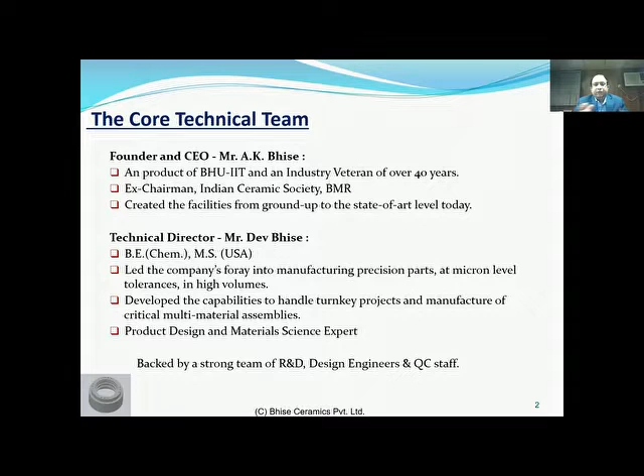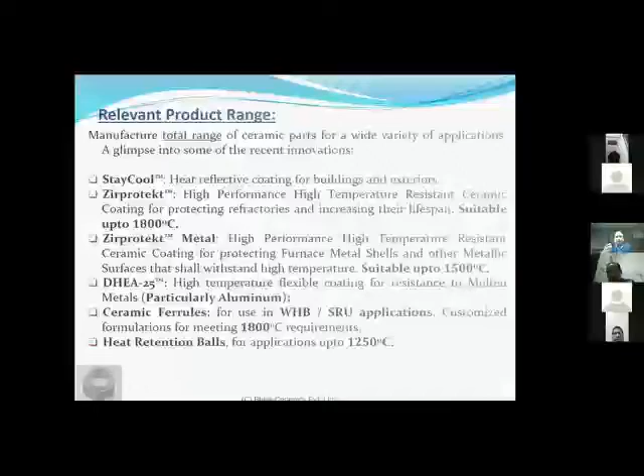Our first initial foray was into precision machining, where we were among the first few people in the country to actually have 3 or 5 micron tolerance products in India. Later on, we moved on to do turnkey projects of corrosion resistance and high temperature resistance, which is when we came to work on high temperature projects and how to have sustainable products. I'm proud to say that after almost 1.5 decades of effort, we have this whole list of products geared towards sustainability.

The first one, as Rege sir kindly put it, is Stay Cool, a heat reflective coating for buildings and exteriors. It's basically a coating - if you apply it to the roof of your building, 95% of the incoming heat gets reflected out, only 4% passes on, and that gets reduced further because this coating has extremely high insulation. So apart from being a reflective coat, it has great insulation properties.

It's a walkable surface. Unlike Western countries, our roofs are used for gatherings, AGMs, meetings and everything else. So this coating sustains all that wear and tear and still provides 95% heat reflectivity. Now imagine if it reflects back 95% of the heat, how much AC bill will get saved because the top slab isn't getting heated.

That's the first product. We have a product called Zirprotekt, which has high temperature performance. It's used inside furnaces where it protects the refractory lining, increases the lifespan, and provides insulation. So if any of you use high temperature furnaces, I would definitely invite you to try out Zirprotekt - you will definitely see a performance increase from your furnace.

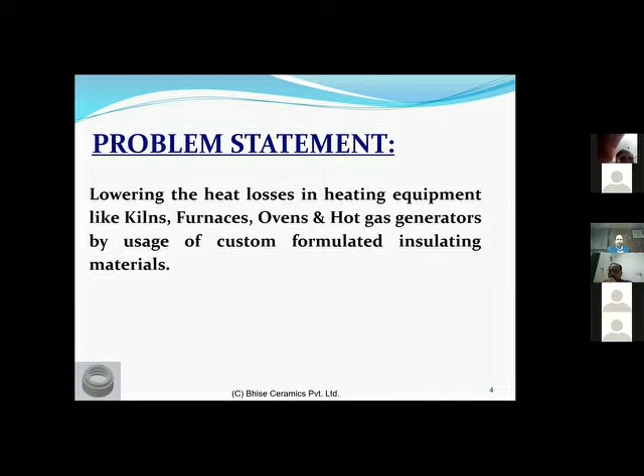They started developing different products from the crude clay bricks, from the crude clay-based coatings in earlier eras. If you go to the history of India and China, they had clay-based autoclaves, as we call them today. Then on, as the materials improved, there was a vast variety of materials that was made available.

Now, in general, what all materials would be there? In the initial days, the early 1920s, 20s and 30s, saw a lot of work on asbestos. They are now banned in many places because unfortunately they are carcinogenic.

Rock wool, glass wool is something that is being used in a very common way because it has got very low thermal conductivity and very low density. This is where the low conductivity comes in, because as you lock the fibers, you're creating a void space between them. So the fibers themselves may have higher conductivity, but the overall package has a low thermal conductivity. But the flip side is it has low density, so common fiber based furnaces or fiber based insulation would have a very thick wall. You would need 2 feet or more of wall to actually have a heat reduction.

Again, they are fibrous in nature, so they pose a health concern. As anyone who has worked with them would know, any fibrous based body almost always poses a health concern for humans.

Now, there are vermiculite based products as well. The vermiculite based approach has a bit of a challenge because there have been cases reported in the USA where the vermiculite itself was found to contain tremolite, which is the most hazardous form of asbestos. Those who want to really research on it can get in touch with me, and I can provide you the necessary links to see vermiculite and asbestos and the impact on health.

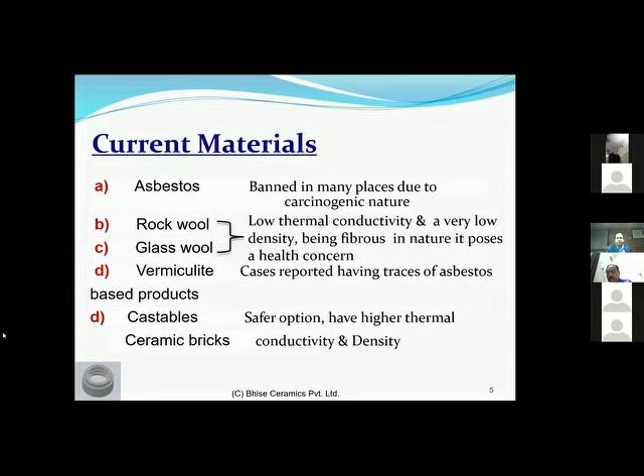More importantly, bricks have more thermal conductivity. Standard bricks used for lower temperatures have thermal conductivity in the range of 1 point something to as high as 1.8. If you go higher in the series, you have bubble alumina, which is at the other end of the spectrum, with thermal conductivity of about 0.17 to 0.18 watt per meter degree Kelvin.

So overall, if you have to categorize an ideal insulation material, it would meet these parameters. It should have low thermal conductivity, meaning it should offer very good thermal impedance. It should have higher density than the wools, so we can go for a lower thickness. Of course, it should not be as dense as the bricks, but it should have a low density compared to bricks, yet higher than the wools.

The material should not pose any health concerns to installers or users. This is very important, because if your users or installers face health issues due to the insulating material, that's a big problem.

And it should be convenient. Nowadays everything is based on convenience. How convenient is the product for installation? Can it be installed with ease, or does it require specialized installation? Does it require joining a lot of parts together? If you're going for a board-based geometry, you have to worry about the joints, sealing the joints, breakages, and most importantly, the leakages.

If it can be cast in situ, that is where the material triumphs, because you can create a continuous wall as long as you want, and if you do it right, it will sustain.

So if we define these parameters to be the critical ones that define good insulation, let us see how Thermprotekt fares against it.

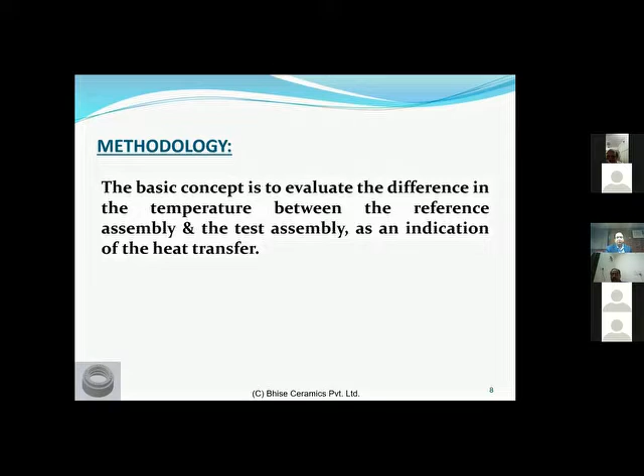You have a base plate, which is an MS plate, and you have a substrate on top. The base plate is made of MS. We have taken a base plate over here so that the heat source heats the base plate.

We have the hot face reading, which is the temperature of the base plate. And you have the temperature of the top of the substrate, which works as your cold face reading. One of the roles this base plays is you really have a uniform heating across the surface, so when conducting this trial, you have a very good idea of what the hot face temperature is and what the cold face temperature is.

Now, how does your test assembly look like? We coat it—we use a substrate which is coated with Thermprotekt, and we put it face down, so the coating is in touch with the hot face, or the heat source, or the base plate.

As you can see clearly over here, this is a coating of Thermprotekt applied on the substrate. The coating thickness is minimal, 1.5 to 1.8 mm. I'm stating this because when you coat it, there are bound to be some variations, and we have worked to make it very accurate.

Sorry to interrupt you, Dev. You have to go a little bit louder, please. Okay, am I audible now? Yes, yes, this voice we require. So I hope the earlier part of the presentation was not Greek and Latin to everyone. See, initially you were okay, then slowly your voice volume went down, so just keep it up. Okay, thank you. How's the Josh? Very high, sir.

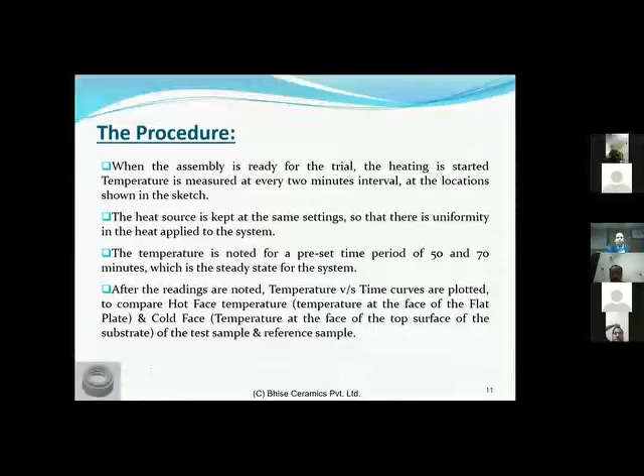If you think in terms of furnaces or any other heating application, a 10-minute earlier stabilization with a 1.5mm or 2mm thick layer, you can imagine the kind of saving this would produce. At the end, when we stopped after 70 minutes, the temperature gap was about 80 degrees. So with a smaller scale heat source, a 1.5 to 1.8mm layer is giving you a difference of 80 degrees.

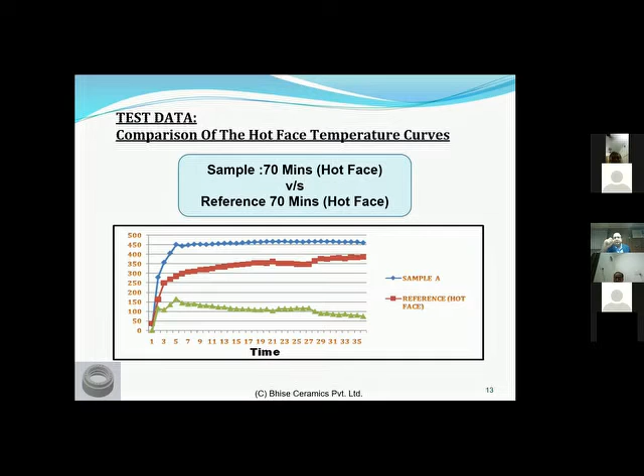We did the same thing for 70 minutes. Here we got about a 120 degree difference. But you can see pretty much the same thing: the curve is far steeper, and you're having stabilization fairly quicker than the earlier one. So in both cases, you can see that usage of Thermoprotekt is really giving you a drastic difference.

Cold face is also an interesting phenomenon. At the measuring time, at the steady state close to the operations, you almost had a 30-degree difference. So if you see your sample phase where Thermoprotekt is applied and the heat is going through Thermoprotekt on the other side of the substrate, versus the reference which has no Thermoprotekt, you'll see the cold phase difference is almost 40 degrees or 30 degrees.

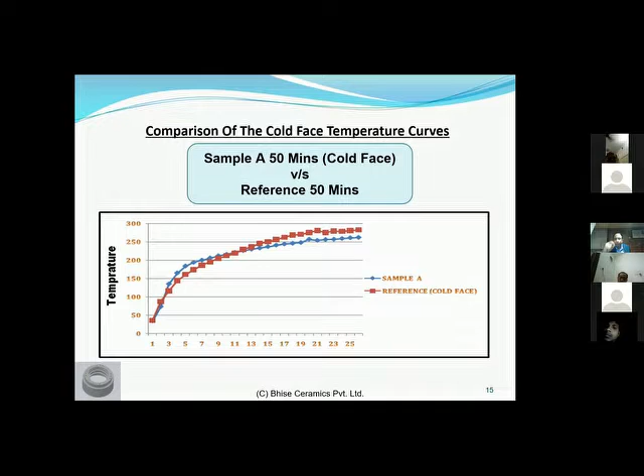So your cold face on that system, over a temperature of about 250 degrees, has a temperature gap of 30 degrees. This is what you're talking of as performance - a small coating is giving you this kind of difference. The same thing is shown here after 70 minutes; the gap has slightly closed down, to about 20 degrees. But we are talking of just 1.5mm thickness.

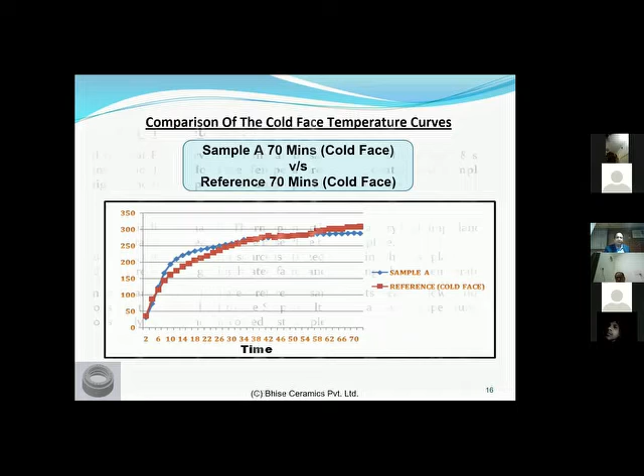So now, to summarize these observations, you can see that if the hot face curves are compared, with the same amount of heat input and the same time period, the hot face of the coated test sample is at a higher temperature than your control sample, and the ramp up rate is much faster. This indicates that even the small layer gives very high impedance to the transfer of heat from the base plate to the SS plate.

What it really means is, if you have a barrier there, the heat actually does the work of warming up the plate and doesn't transfer it to the substrate on top. In terms of your furnace, more amount of work would be done inside the furnace, warming and heating the articles, rather than the insulation eating away into the heat.

So this is what we are saying - it will help retain the heat inside the heating equipment. It shall help the heat come faster, your ramp up rates would go faster, and you would have savings on energy due to lesser losses.

As we saw in the earlier case, the steady state temperature was attained in about 11 minutes versus 21 minutes in the control. You can have more heat working on the components inside than on the insulation because of this. Again, if you see the cold face, you will have a cooler cold face. So the trend is that you need the cold phase, the exterior of the furnace, to be something you can touch.

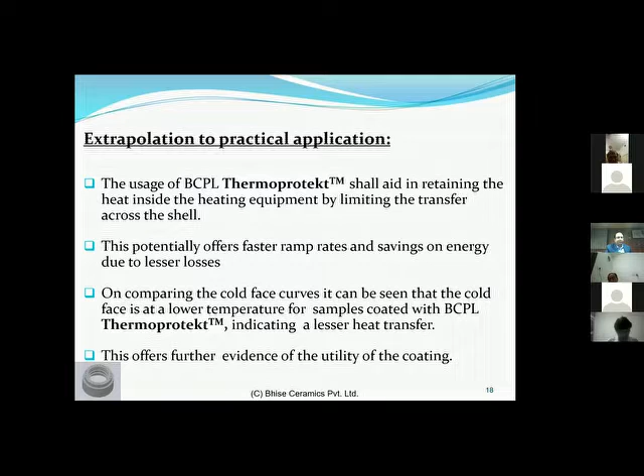So for those kind of requirements, this is an ideal product, because if you use a last layer on the inside of the shell, it will really help in taking away the last bit of heat that goes across the furnace. So coming to the conclusion of this presentation, as we move further, some of the characteristics of Thermoprotekt, as we would like to share with you.

The thermal conductivity is around 0.13 to 0.15 watt per meter Kelvin. The density is 0.65, and the density of water is 1, so this is an insulation that will actually float on water. The max usage temperature is about 700 degrees centigrade.

So it will work for major applications of furnaces where you're having ovens used in the automotive industry for curing of paints, ovens used in various other metal processing industries, as a back end for various ceramic-based furnaces, or any high temperature furnaces. They can be used in heat treatment furnaces with a top coat of Thermoprotekt.

So if you use Thermoprotekt to face the hot phase and Thermoprotekt as a backup layer, you can see a solid amount of savings there. The beauty of this is the PLC at 700 degrees is just 1.5%. And LOI, which is the moisture content after you dry it up, is going to be about 0.5 to 1%.

So we are talking of various applications over here. The world is massive for the applications of this product. And one of the reasons that we have this ASM around is to look for such applications and create energy savings such that the planet becomes sustainable to hand over to the next generation.

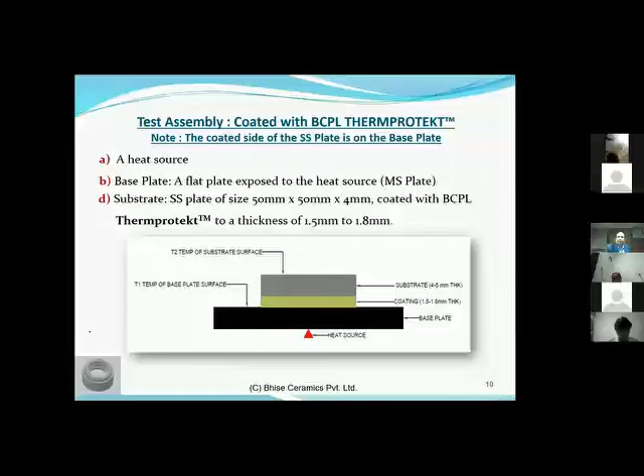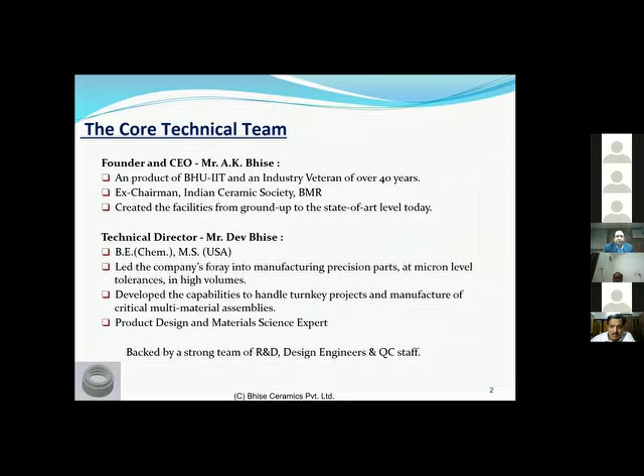So this is more about our team. My father, who is there on this call right now, he's an IITian from BHU and a veteran. This was known. Just go through this thing, the slides, no need to talk about it.

See, the question here is, are all these products innovations through... I mean, how, but these products have been innovated by you only, or how is it?

Yeah, this is all manufactured, designed, and tested in-house by us. And patented also - we are in the process of patenting them at the moment.

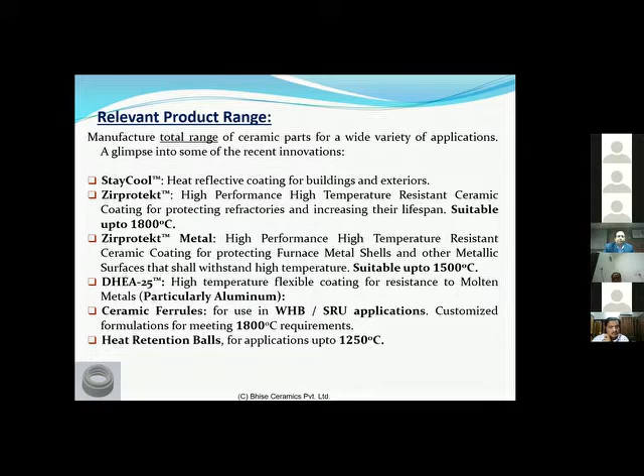Awesome, okay. You may rush through the slides right here. Yeah, go ahead, please. Yeah, move on, please.

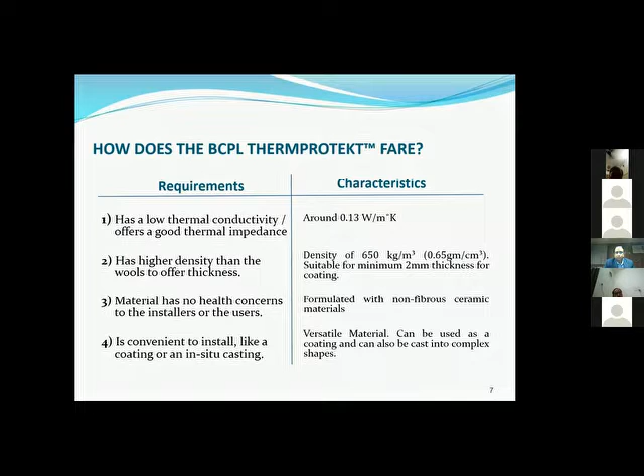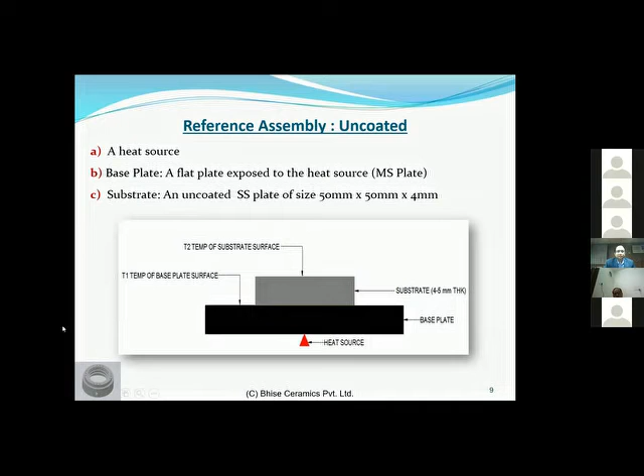Mr. Bhise, thank you very much for a very nice presentation. It appeared that it is not coming from an industrialist, but from a professor. I will take that as a crisp compliment. Very short but nice presentation. Both son and father, you are from IIT. Of course, your father's time it was not IIT, now of course it is called IIT BHU. So first, congratulations for that.

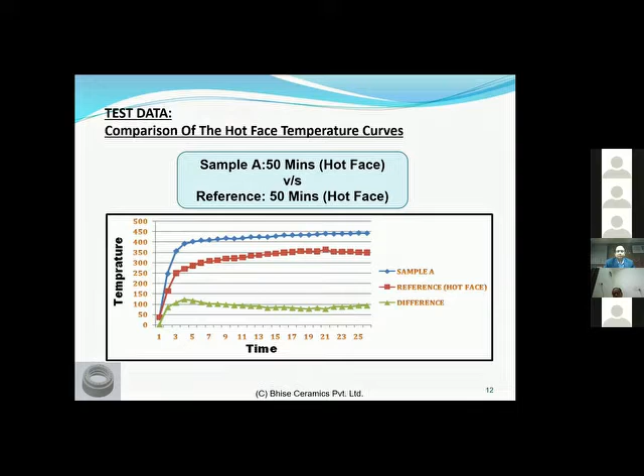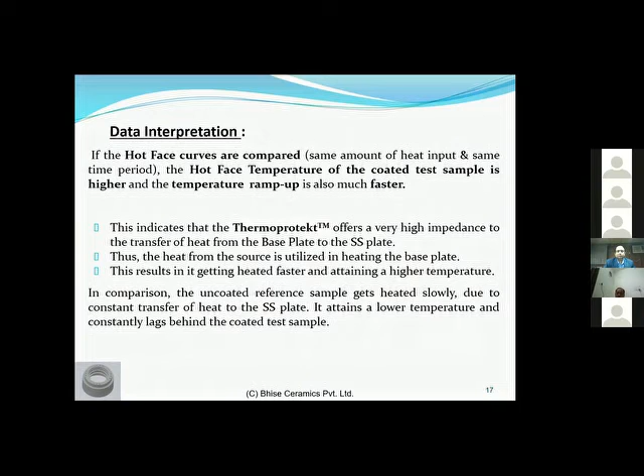I have, it's a very nice area, I'm not working in this area, but I would just like to know: are they monolithic ceramic or are they composites? Some of the things we know about ceramics is that they are very brittle. Normally, when they go through these temperature variations, there is thermal fatigue - so what is the life of that? First thing, and some of your ceramics that you mentioned can resist up to 1800 degrees centigrade - it's fantastic. So can they, and they are light - are these same ceramics used for space programs? You know that one incident that happened, the accident due to these tiles which came out - so can they be used for space programs, for re-entry vehicles?

So let us go one by one to what you said. Your first aspect was about fragility. Any ceramic is going to be fragile, that's its inherent nature. What happens is, when you're working as insulation, I'll stick to Thermprotekt and then come to Zirprotekt. Thermprotekt has been designed for use in applications where you have some inherent protection around it, like on the backup side of your furnace, or if you have an oven, it's on the inside where you're not going to see any component coming in touch with it.

So ceramics obviously are going to be fragile. Thermprotekt is also fragile by nature, and it has to be handled with due care, such that there has to be no impact on it and no components running through it, so that you get the maximum life on it. Of course, we have our own process where we have a top coat on Thermprotekt, which makes the surface very rigid, and that increases the life of Thermprotekt as well.

Now, coming to the second part, I think it was the Columbia tragedy you're talking about, where we lost an Indian origin astronaut, Kalpana Chawla. So over there, what happened was their heat tile actually came off during launch because of the impact.

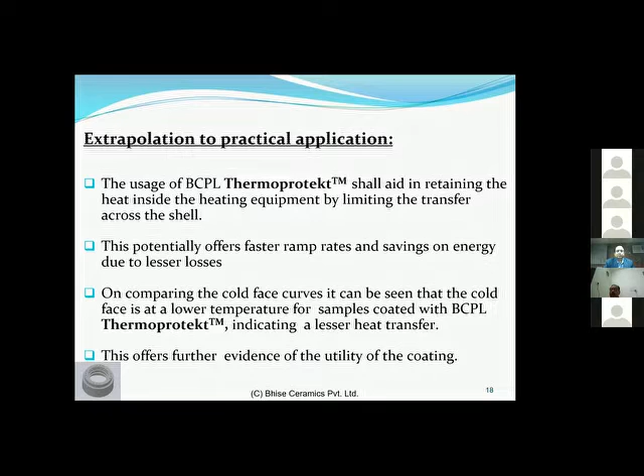But you see, in India, everything is imported. So now we are looking for import substitutions. So are Indian companies not capable of making that type of ceramics? There are some Indian companies doing that ceramic, but I'm not too aware of it because it's not a product we have taken too much attention towards.

Now the last question - you are both from IIT, and... Professor Prasad, we have lost your voice.

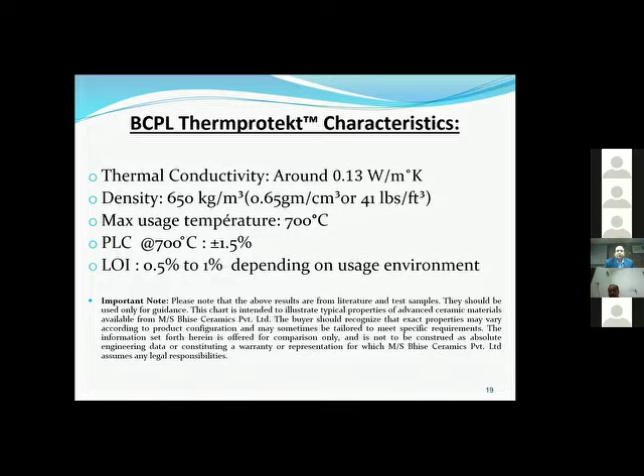Yeah, I think the meeting got disconnected.

I was just asking what is the offering for the students? Do you offer some programs to give knowledge to our engineering students? Because 10 lakh students pass engineering, and very few from IIT and BHU. So for these private colleges, tier 1 and tier 2 institutions, what type of academia and industry interaction, particularly with reference to your industry, can we have?

Definitely, ASM has got very good programs of interaction between industry and academia. I would really invite you to be in touch with Vivek sir, because he will take you through the whole process of what ASM does for industry and academia interaction.

He's a member of ASM. I am a life member of ASM, and Vivek Singhal is my student. I was trying to directly connect to you to ask if we can come and visit your R&D center to find out some areas where we can make some interaction. You're welcome to visit us at any point of time. Thank you.

Can it be used for boiler furnace tubes? For boiler furnace tubes, we have ceramic based ferrules that we are doing. I would invite you to share your contact information so we can be in touch with you on that. But on the exterior side of the boilers where you have got heating out, Thermoprotekt would be an excellent option for protection.